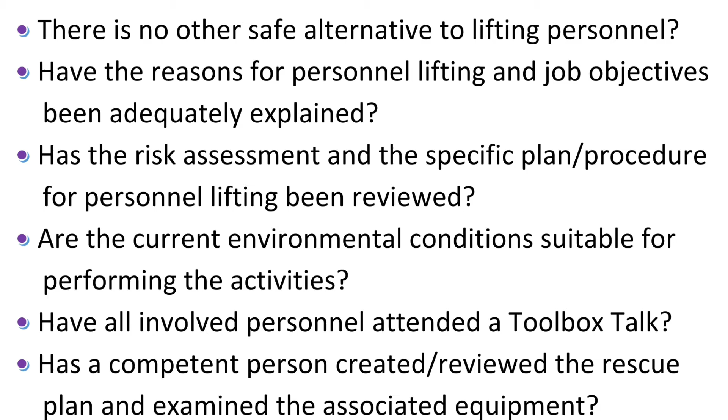Is the relevant permit to work in place? Have all control measures been implemented? Have all other planned activities that may interfere with personnel lifting been stopped? Have do not use warning signs been placed on any other machinery which may interfere with or compromise the safety of the operation, machinery isolated if possible?

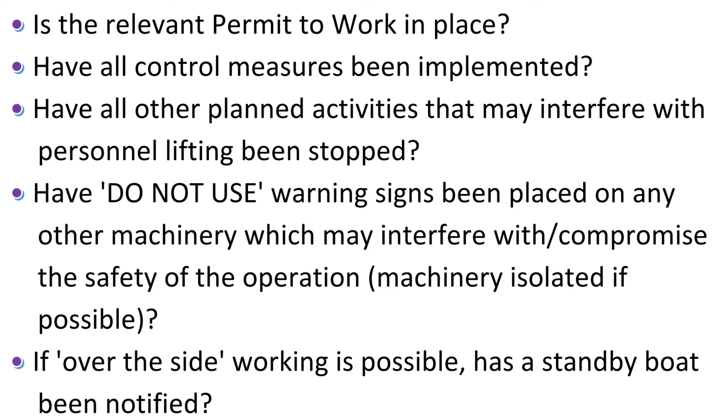If over-the-side working is possible, has a standby boat been notified? Have the radios been checked and tested, using a dedicated channel? Is the rider wearing a helmet chin strap? Is the crane marked suitable for personnel lifting and is the crane certification in date?

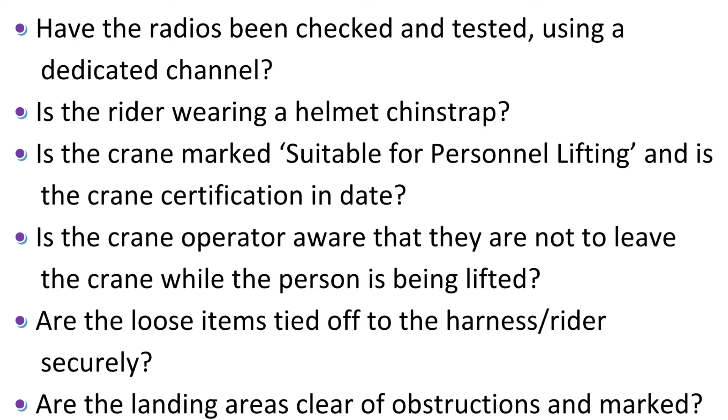Is the crane operator aware that they are not to leave the crane while the person is being lifted? Are the loose items tied off to the harness rider securely? Are the landing areas clear of obstructions and marked? Is the carrier marked with SWL and number of people suitable for personnel lifting?

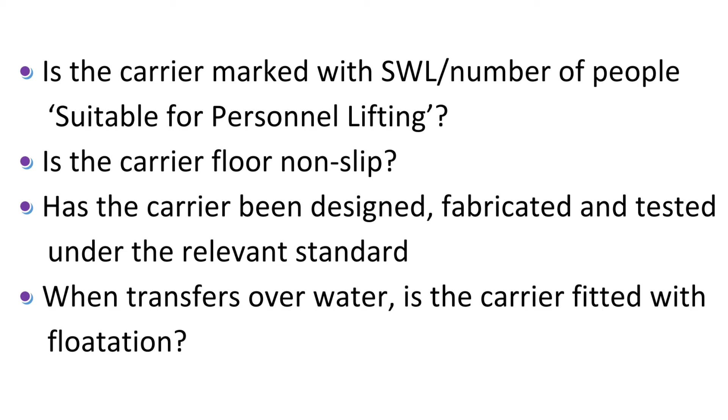Is the carrier floor non-slip? Has the carrier been designed, fabricated, and tested under the relevant standard? When transfers are over water, is the carrier fitted with flotation?

When using a crane to lift personnel, you are to consider: has it been established that no other viable option of carrying out the work is available? Are all the necessary certificates for the crane wire ropes, slings, and other associated equipment current? Has the crane and associated equipment been thoroughly inspected by a competent person?

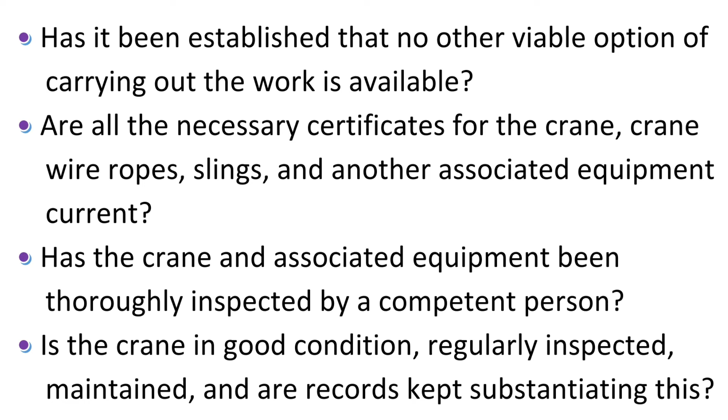Is the crane in good condition, regularly inspected, maintained, and are records kept substantiating this? Are all the safety features and systems working properly, for example, rated capacity indicators, overhoist limiters? In the event of a complete power failure, does the crane maintain the load in a safe condition, for example, do the brakes fail to the applied position?

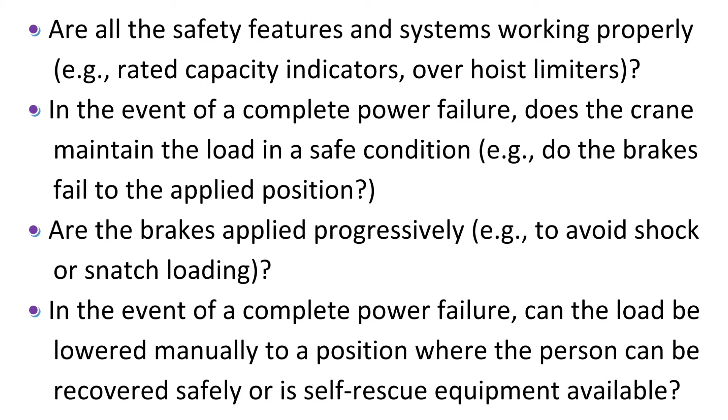Are the brakes applied progressively, for example, to avoid shock or snatch loading? In the event of a complete power failure, can the load be lowered manually to a position where the person can be recovered safely, or is self-rescue equipment available?

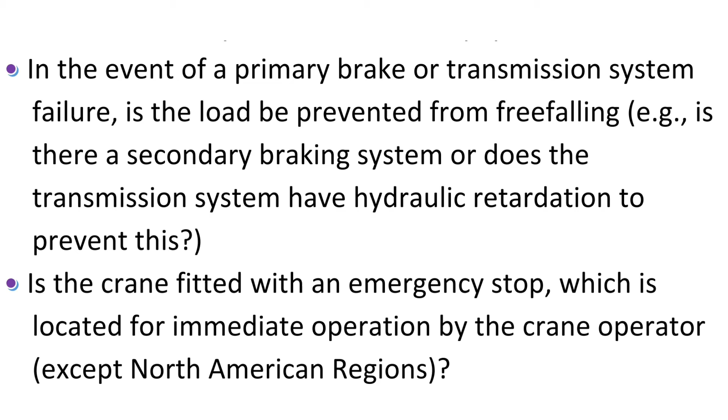In the event of a primary brake or transmission system failure, is the load prevented from free-falling? For example, is there a secondary braking system or does the transmission system have hydraulic retardation to prevent this? Is the crane fitted with an emergency stop, which is located for immediate operation by the crane operator, except North

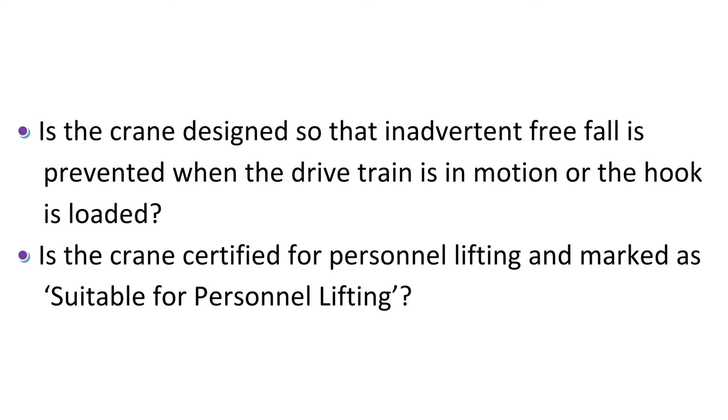When using a winch to lift personnel, you are to consider: have the reasons for personnel lifting and job objectives been adequately explained? Have the risk assessment and the specific plan procedure for man riding been reviewed? Are the current environmental conditions suitable for performing man riding activities?

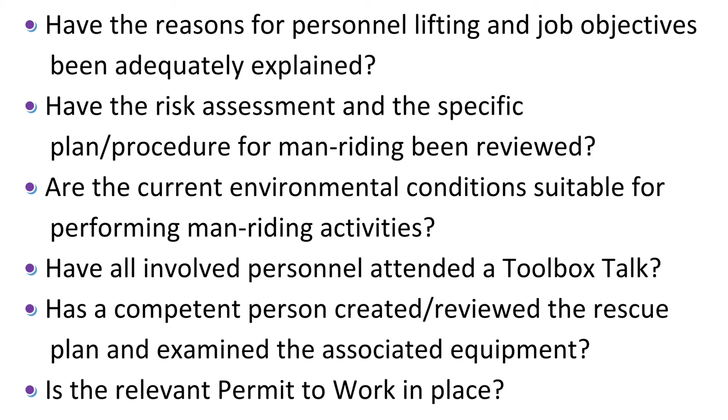Have all involved personnel attended a toolbox talk? Has a competent person reviewed the rescue plan and examined the associated equipment? Is the relevant permit to work in place? Have all control measures been implemented? Have all other planned activities that may interfere with man riding been stopped?

Have do not use warning signs been placed on any other machinery which may interfere with or compromise the safety of the operation, machinery isolated if possible? If over-the-side working is possible, has a standby boat been notified?

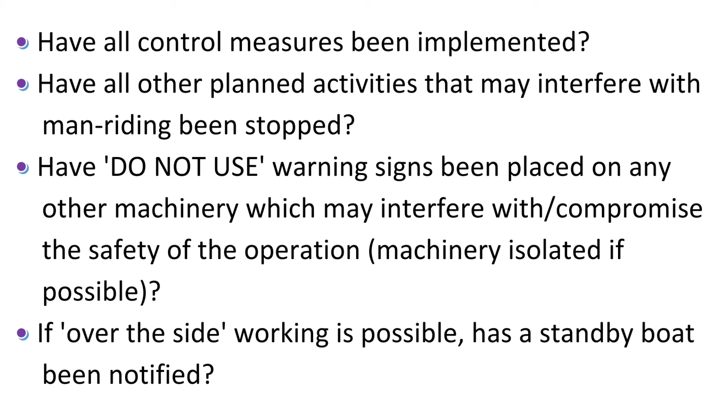Have the hand signals for raise, stop, and lower been agreed by all involved? Has the winch operator agreed on the principle of no signal equals no movement? If using radios, have the raise, stop, and lower commands been agreed by all involved? Have the radios been checked and tested, using a dedicated channel?

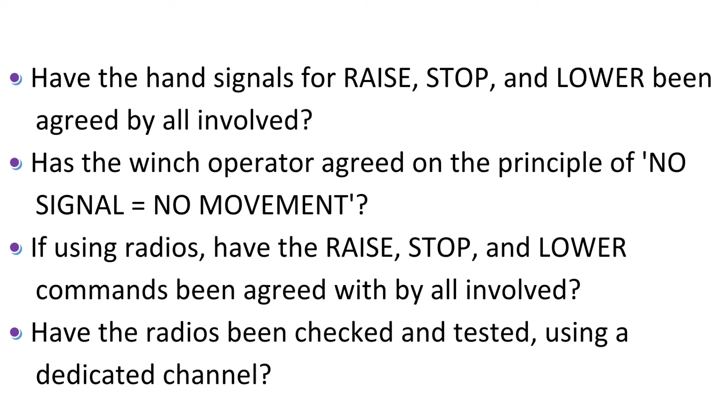Are the harness, karabiner, shackle, and winch rope certification in date, clean and all in good condition? Has the harness been adjusted properly, and is the rider wearing a helmet chin strap? Is the winch line connected directly to the harness, for example, no swivels or hooks?

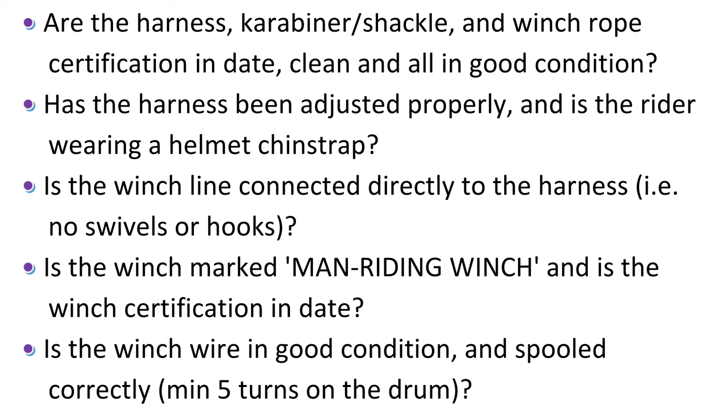Is the winch marked man riding winch and is the winch certification in date? Is the winch wire in good condition, and spooled correctly, minimum 5 turns on the drum? Where possible, have obstructions to vertical travel been removed or tied back? Are the manual and automatic brakes operating correctly?

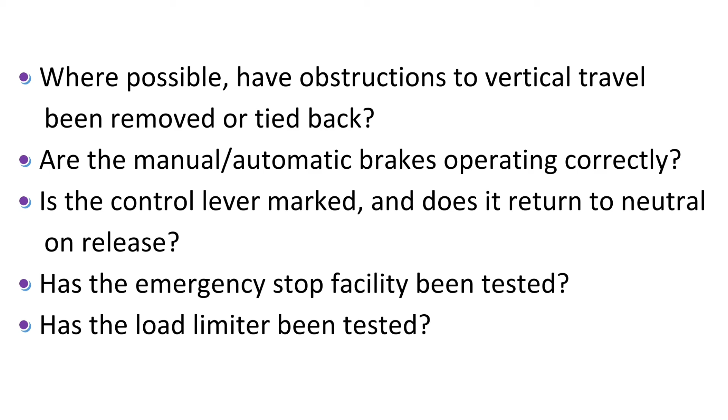Is the control lever marked, and does it return to neutral on release? Has the emergency stop facility been tested? Has the load limiter been tested? If a fall arrestor, inertia reel, is to be used, has it been tested before use, and does it have a separate means of connection to the harness? Note: safety hooks are not permitted.

Is the winch operator aware that they are not to leave the winch while the person is man riding? Are the hand tools of sufficient size for easy handling? Are the hand tools tied off to the harness rider securely? Have the rider's pockets been emptied of loose articles, especially money and other small metal objects?